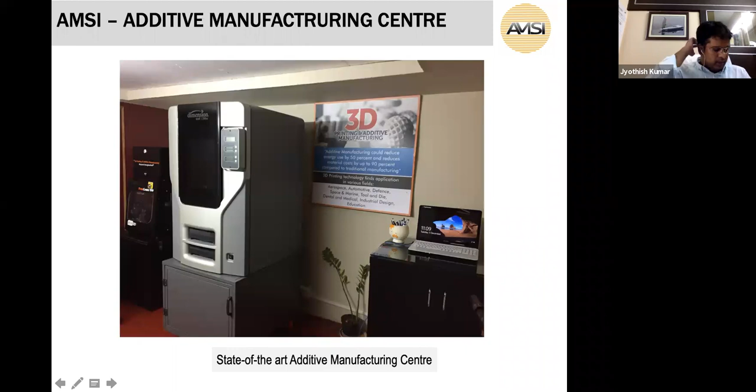We also have an MOU with the International Additive Manufacturing and 3D Printing Associations. This is one of the latest ones we formed, signing an MOU with the Asian 3D Printing Union in Korea, where we organize an annual event. I represent the Additive Manufacturing Society of India and the whole 3D printing community sectors from India.

Some of the other MOUs signed were with the French Rapid Prototyping Association, CMRDI, the Central Metallurgical Research Development Institute in Egypt, and an MOU with the German Consulate in India, focusing on 3D printing and research activities especially for defense, aerospace, and academic R&D segments. We also have an MOU with the British Deputy High Commission in India, to focus on various research projects related to 3D printing.

This is a brief introduction about our association and organization. Now I'll touch upon the basic introduction of what is 3D printing and additive manufacturing before I get into the latest metal additive manufacturing and applications.

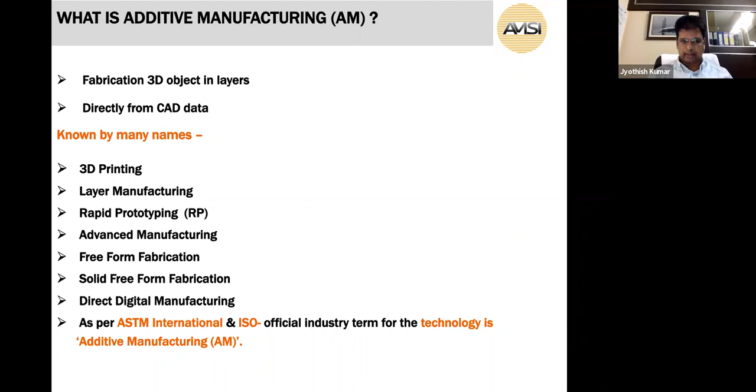There are three types of additive manufacturing processes: liquid based, solid based, and powder based. In liquid based, there are various technologies because the raw material is in liquid form, such as SLA stereolithography apparatus, then PolyJet printing, also called multi-jet printing, where the raw material is liquid and a laser cures it, converting it into a solid object. The solid based process is called FDM, fused deposition modeling, where the raw material is in solid form, that is in the form of a wire.

Then powder based, we have two types, one for plastic and one for metal. For powder based plastic additive manufacturing, it's SLS, selective laser sintering, where the raw material is duraform, a nylon powder. In case of metal, the process is called DMLS, direct metal laser sintering, and also LMD, laser metal deposition. These two processes use powder-based metal powder to fuse and form an object into a solid object by adding the metal powder layer by layer.

Another process is called EBAM, electron beam additive manufacturing, also called wire-fed metal additive manufacturing process, where metal powder is not used. Instead, the metal is fed as a wire into the machine, and a high powered electron beam melts the metal wire and forms the object layer by layer by adding material onto the object as per the CAD data.

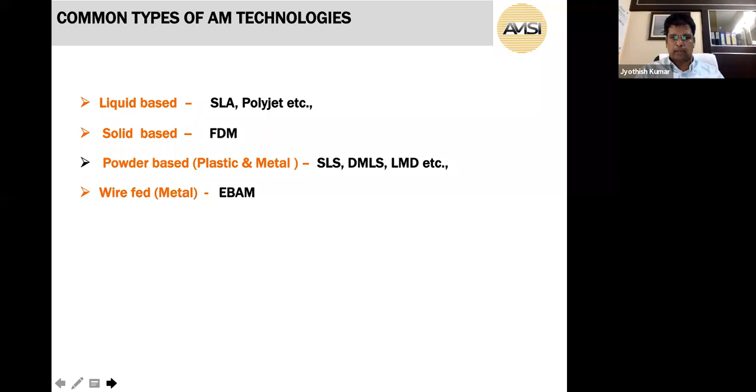I'm going to take one of the case studies where we have used a live case study for the HAL engine division. I got permission to share this PPT, and we have done fantastic research for Hindustan Aeronautics Limited.

The process we used here is laser metal deposition, which is a blown powder additive manufacturing process. The powder is blown into the platform, and the high power laser melts the powder and forms the object layer by layer based on the CAD data. The raw material is fed to the building chamber, and the laser melts, cures and solidifies, building the object layer by layer from bottom to top.

High powered 2 to 5 kilowatt fiber optic and CO2 lasers are used to melt the metal powder. There are various types of metal powders we can use: maraging steel, stainless steel, low carbon steel, then Inconel, with various types like Inconel 625, Inconel 718, and so on. There's also a latest material called MAR-M.

MAR-M is a lightweight material used for aerospace applications. Also cobalt, chrome, titanium are highly precious and important metal alloys for aerospace applications, along with tungsten carbides. Even copper can be used — the latest developments show copper powder can also be used to make components using this process.

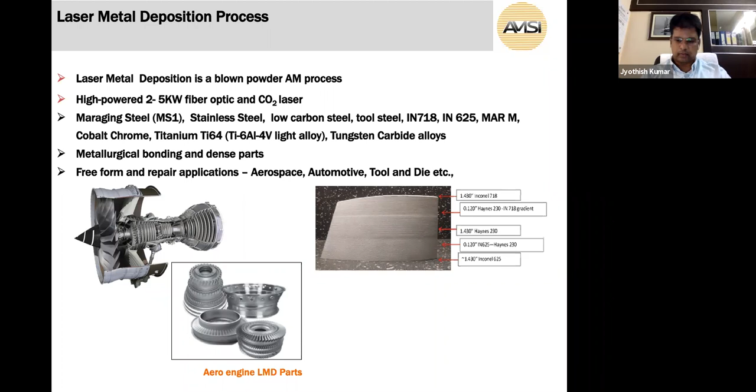I would like to show the video of LMD just for a better understanding of the process.

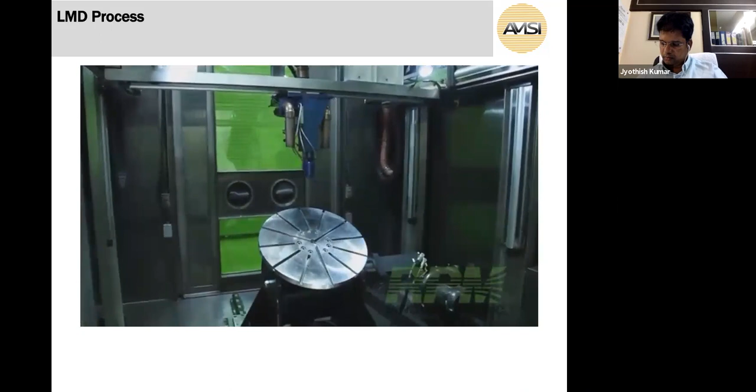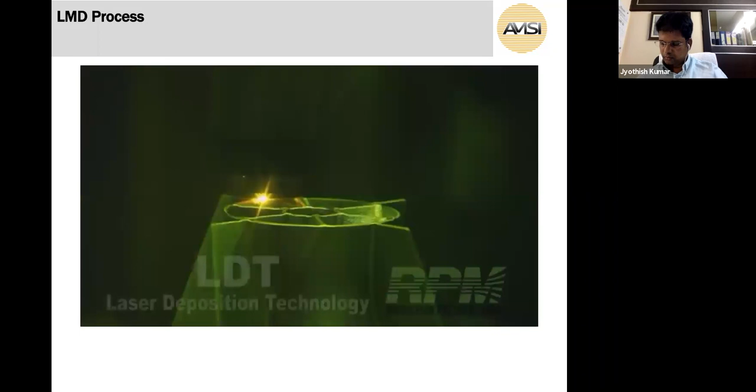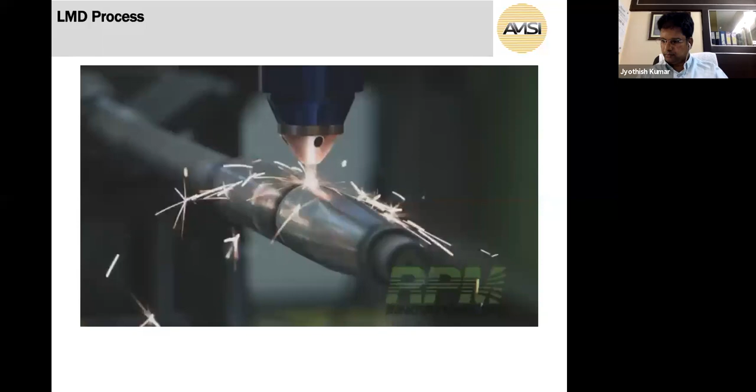LDT, which stands for Laser Deposition Technology, is an additive process used to build freeform fabrications. It repairs metal components typically considered non-repairable by conventional techniques, or strategically adds features to forgings or castings. All capabilities come directly from CAD data, and no hard tooling changes are required.

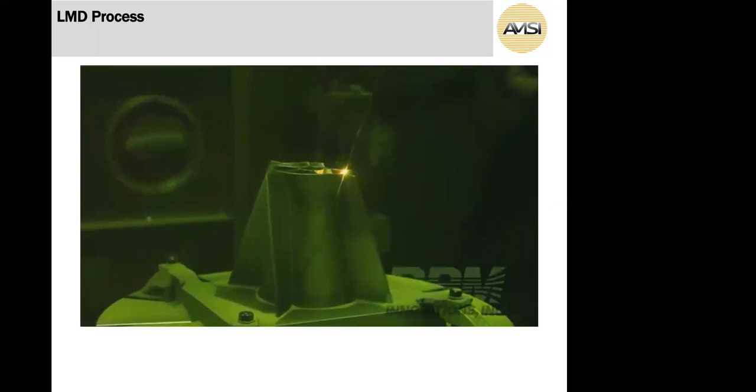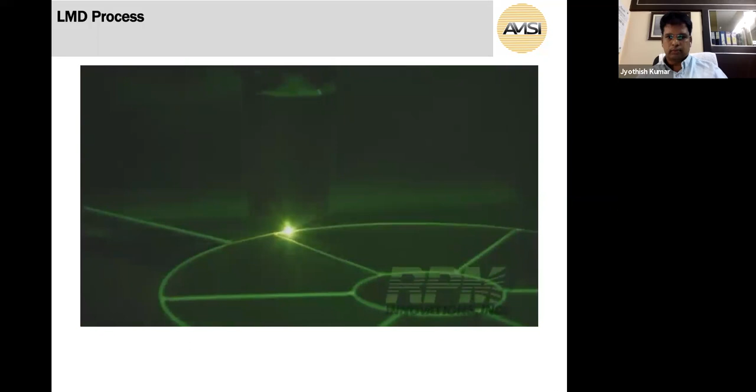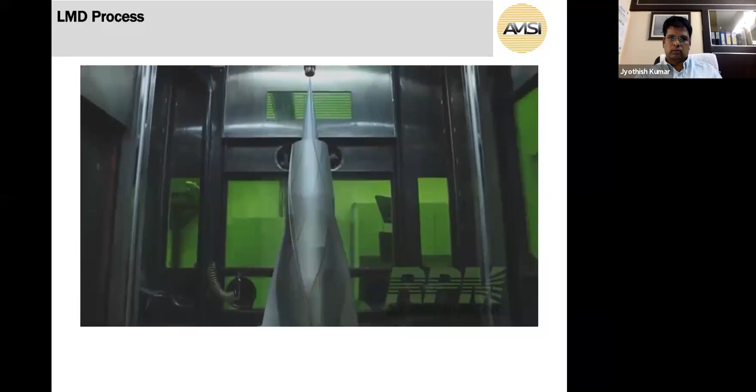LDT deposits exhibit excellent material properties. These properties, combined with the flexibility of the process, significantly lower overall production costs. When used for manufacturing and the production of prototypes, the LDT process greatly reduces product development time.

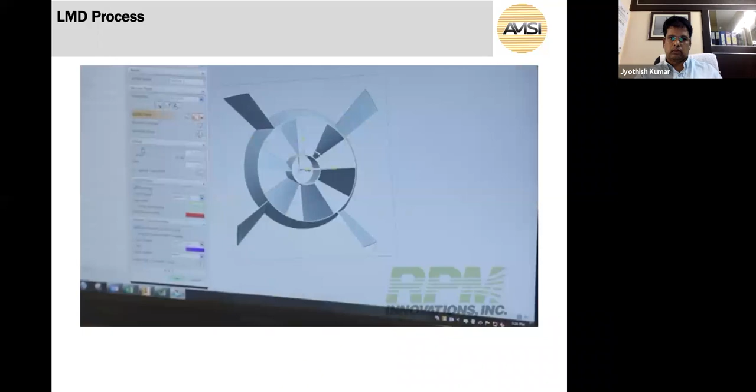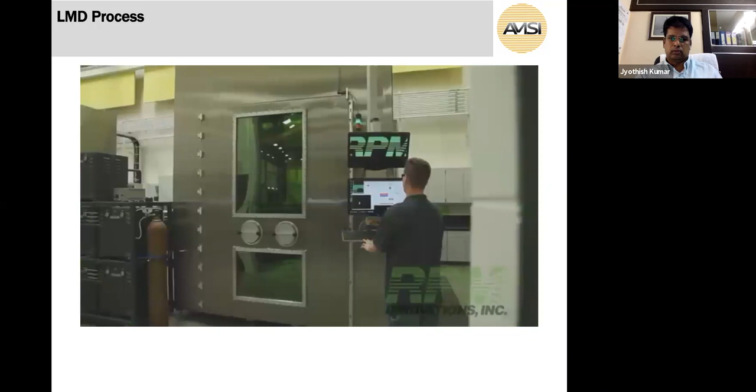First, a 3D CAD file is created that defines the component to be built. Next, the system software uses this file to slice the piece into numerous horizontal sections and then creates a toolpath for each layer. This toolpath is followed by the laser as the piece is created, layer by layer. The build takes place in a controlled environment chamber with less than 10 parts per million oxygen.

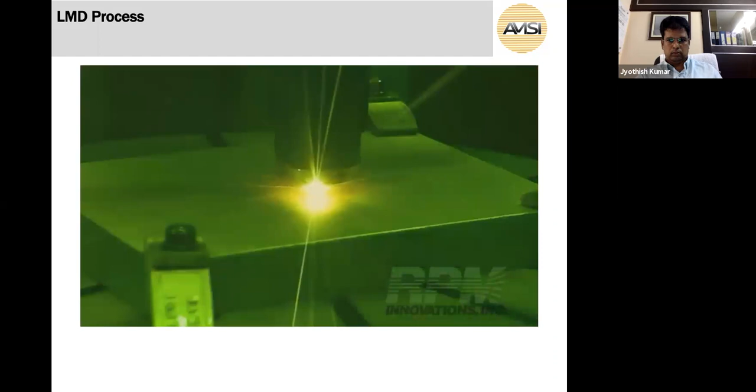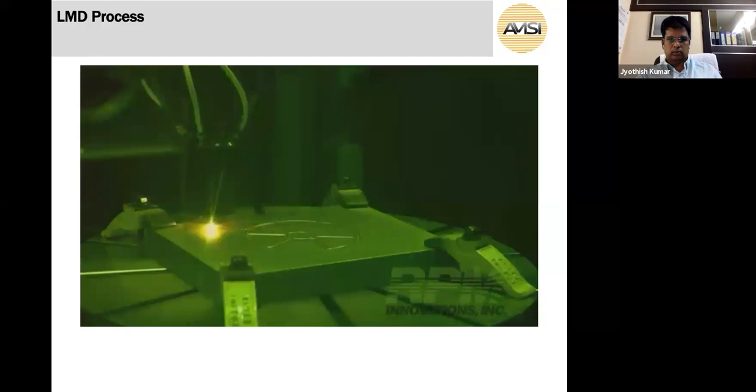Once the chamber is prepared, the build can begin. The laser fires and creates a melt pool on the surface of the target plate. A stream of powdered metal is delivered into the melt pool. When the powdered metal impacts the melt pool, it is absorbed and creates a weld bead. Fusing multiple layers together generates a 3D solid metallic build.

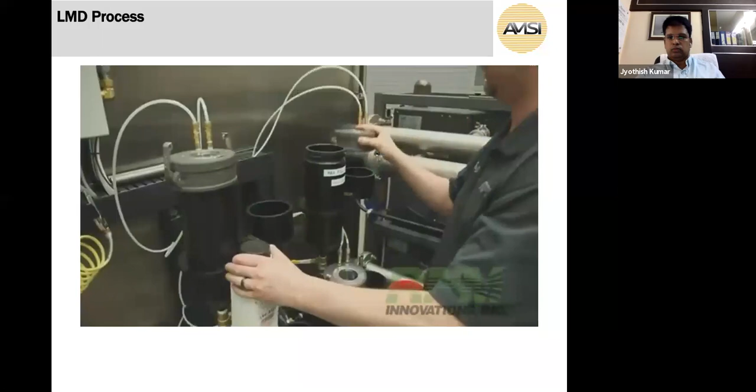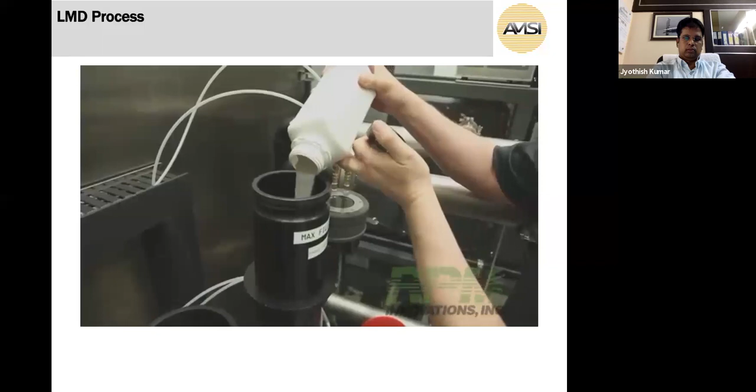A variety of alloys can be used in this process, including tool steels, stainless steels, nickel, cobalt, and titanium alloys. Deposit quality and consistency is of primary importance for all laser deposits.

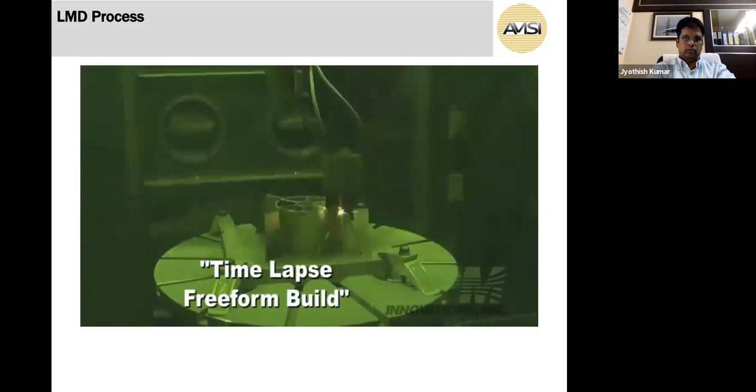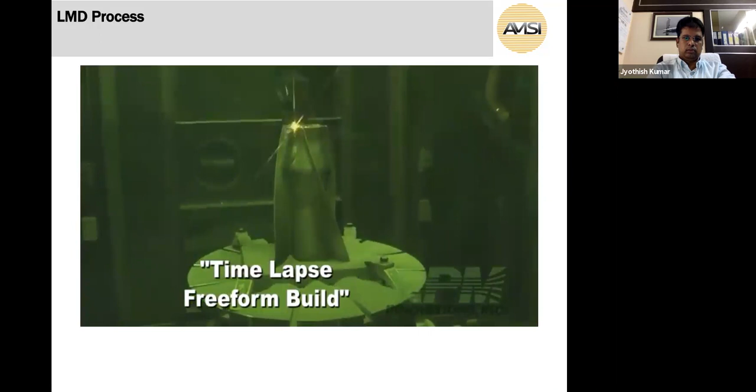Weld beads are produced in a very low oxygen environment with a very small laser spot size and relatively high travel speeds. The laser deposits have extremely high cooling rates. These cooling rates generate a very small localized heat affected zone, thus minimizing distortion. Also, the high cooling rates result in laser deposits that have very fine microstructure. Therefore, the deposits typically have similar mechanical and physical properties compared to wrought products.

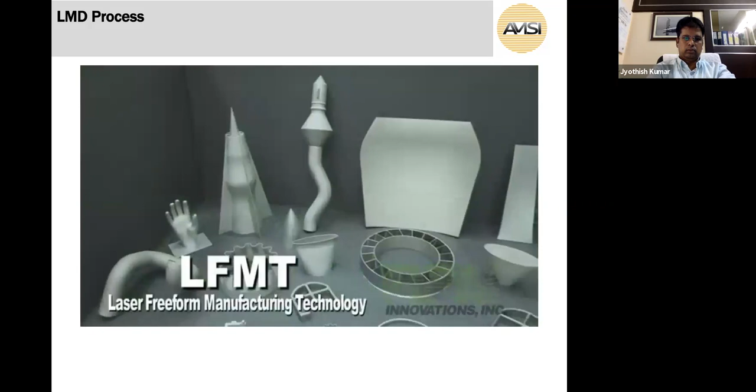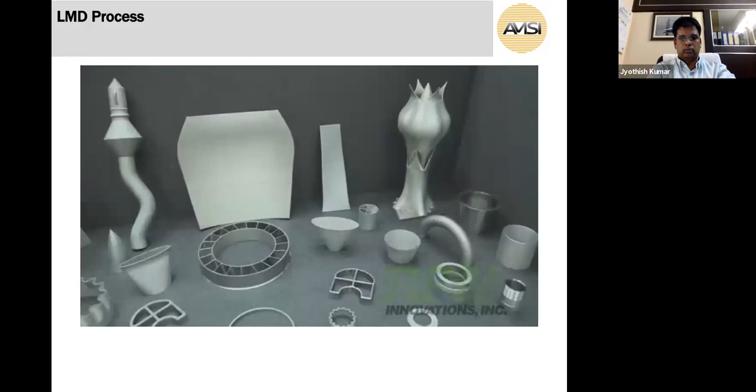LFMT, which stands for Laser Freeform Manufacturing Technology, possesses a unique ability to build parts with novel geometries from high-quality metal alloys and may transition to functionally gradient material compositions, opening the door for the production of breakthrough end products.

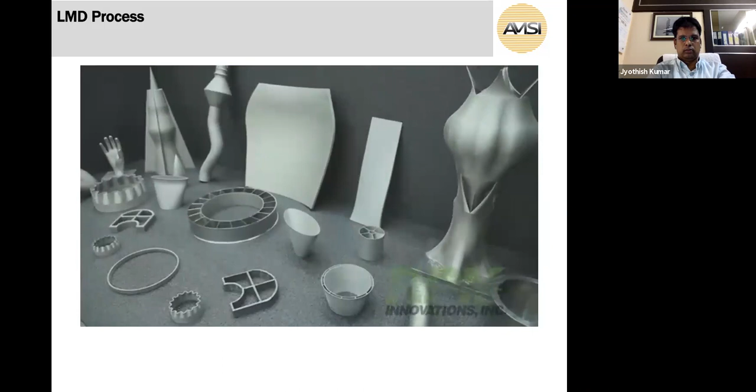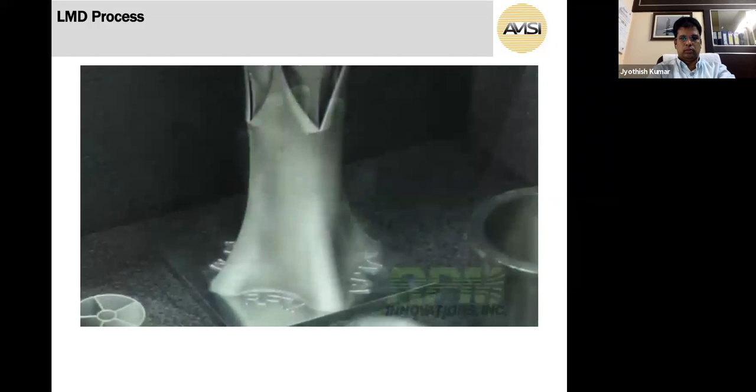Complex forgings and castings may be simplified and reduced in size, followed by the creative addition of specific features using the process. Substantial material and cost savings may be achieved using this novel combination of processes. Additional cost savings may be realized by the reduction of final machining time.

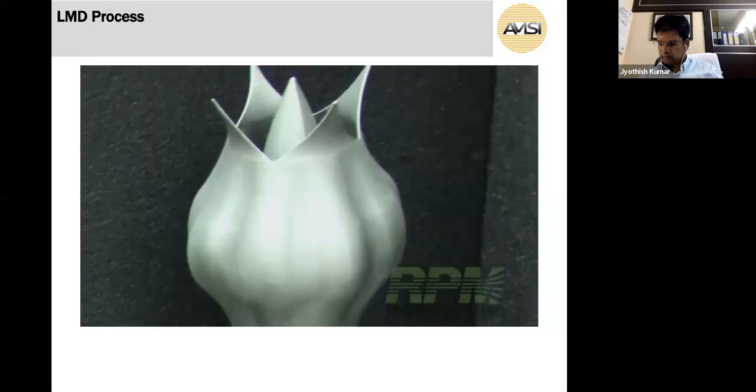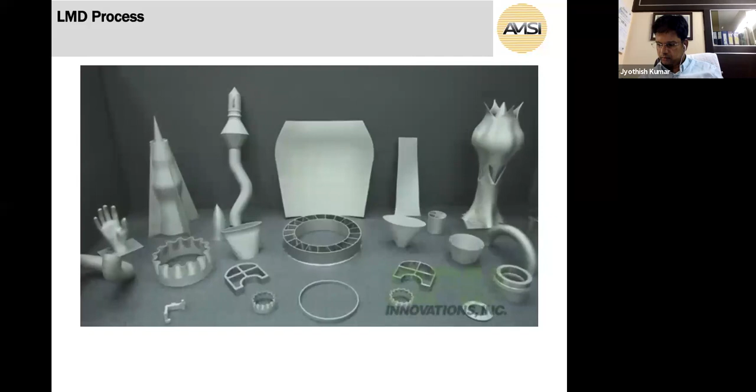Implementing design changes and new iterations for freeform builds is far simpler using this process than many traditional processes. Modifications are made in the CAD model, new toolpaths are generated, and a new version of the piece is deposited.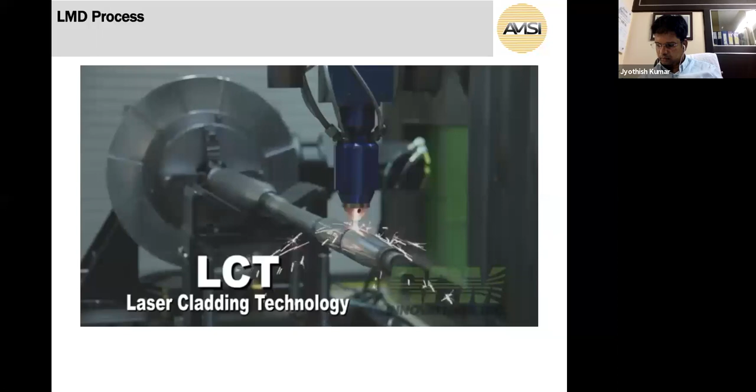LCT, which stands for Laser Cladding Technology, is also a very effective process for performing repairs on heat-sensitive materials, such as 4340 or PH-grade stainless steels.

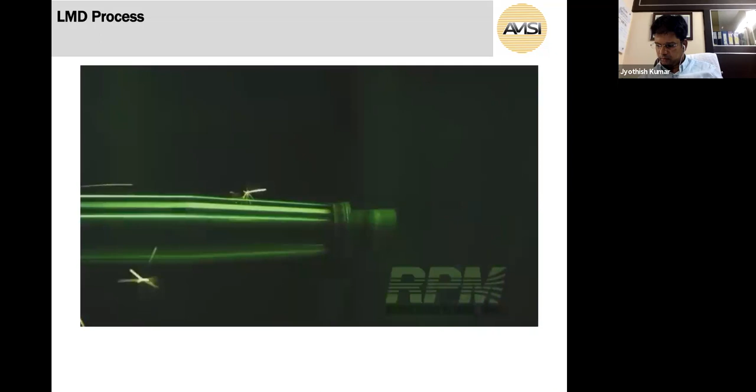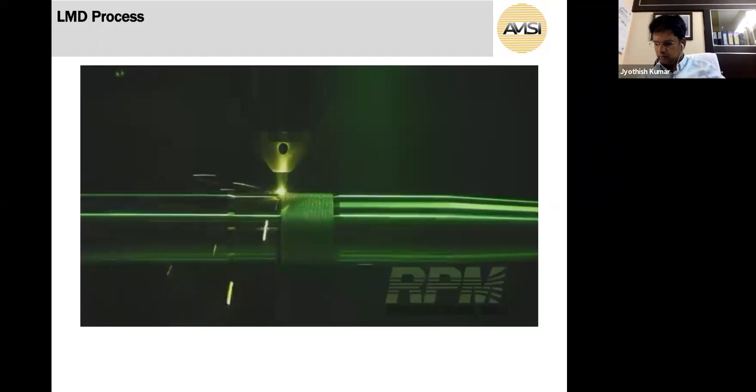After the wear area is identified and a tool path is generated, the repair is initiated. By carefully controlling laser power and travel speeds, the heat-affected and dilution zones are minimized. The result is a very low stress input into the part, which results in very low distortion.

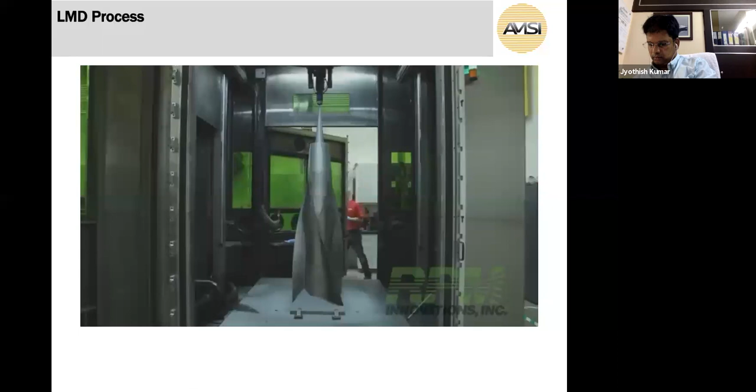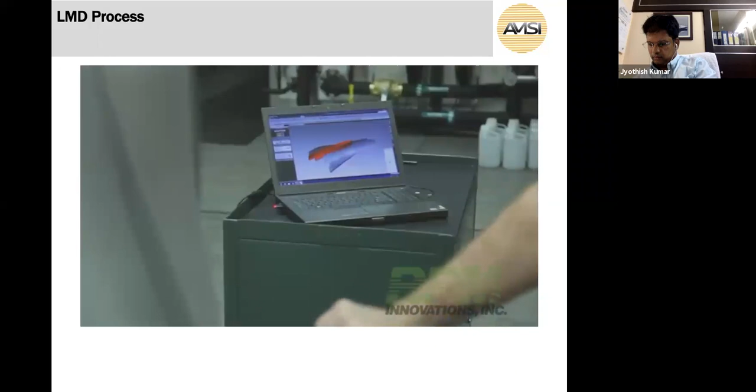After a build is completed, the component is scanned using a portable CMM and scanning laser. The scanned file is compared to the original file to be certain no significant distortions have occurred and that enough material has been deposited to ensure cleanup during final machining. Minor discrepancies are carefully noted so that future potential distortions can be compensated for and therefore avoided.

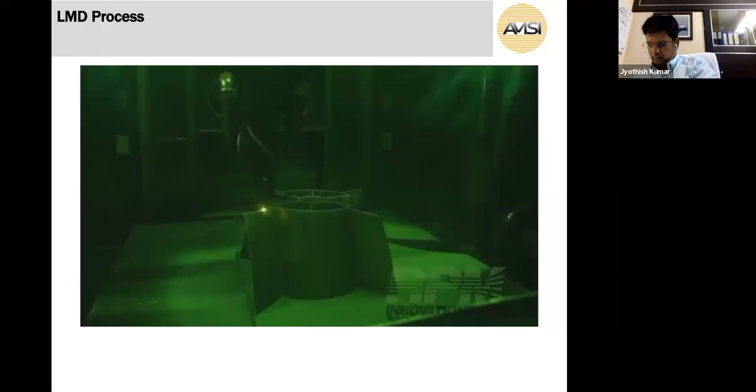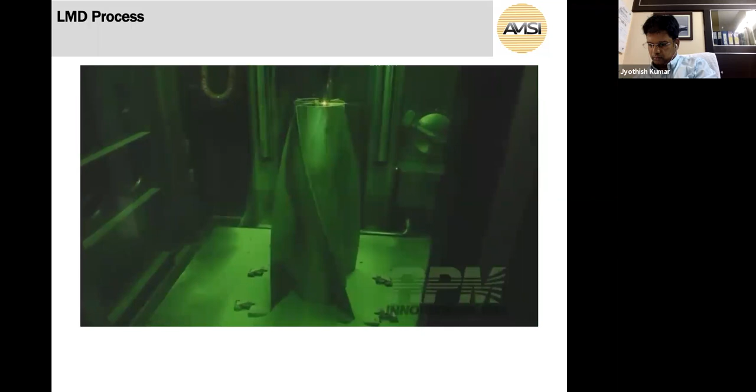With laser deposition technology, potential applications are endless, and the advantages over traditional methods of creating small runs, prototypes, and performing repairs are substantial. Lower per-piece production costs, lower upfront tooling costs, and greatly decreased development time represent significant savings in time and money. Enhanced design flexibility leads to better products.

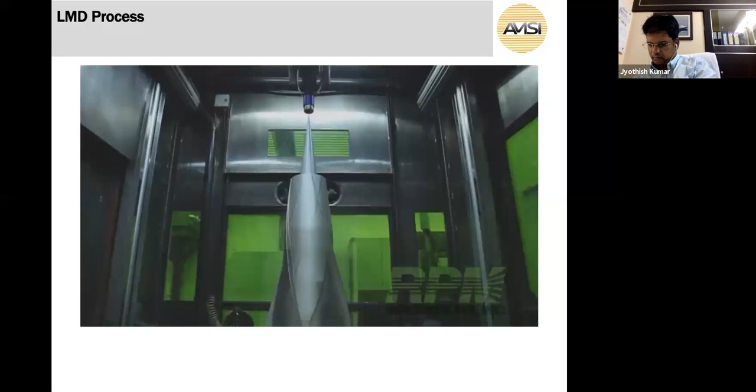Superior material properties provide longer product life, and the process can create products and repairs that are impossible using current traditional methods. For answers to your questions about specific applications, contact RPM Innovations Incorporated.

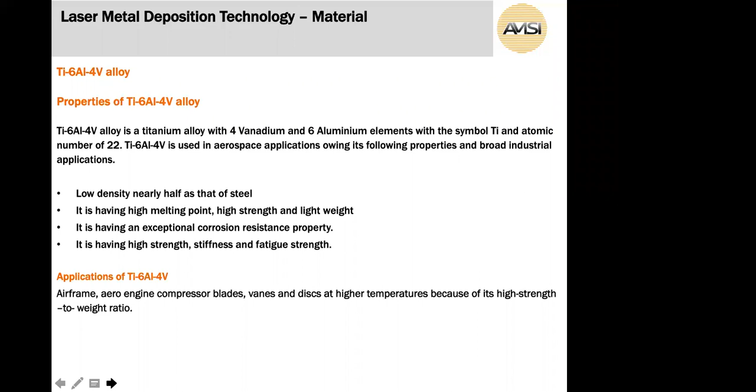So these are very critical, important aspects for aerospace applications, whereas the aero structure or the aero engine part has to take care of the load at higher speed, and also at the same time it should not contribute a higher ratio weightage to the structure or the part, because thereby it reduces the fuel consumption of the aero engine.

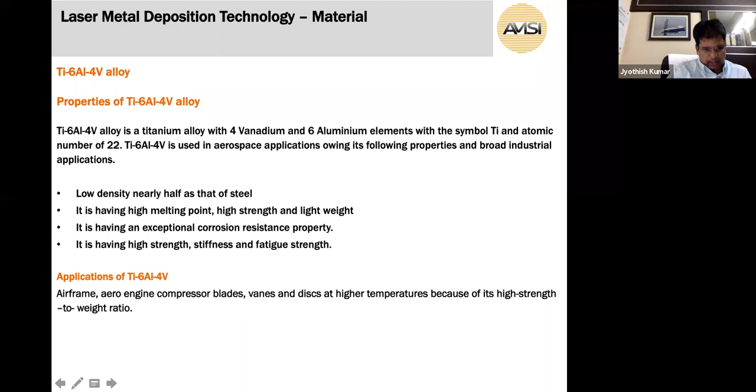The case study we have done is for HAL engine division, on repairing an axial compressor blade. This is an actual case study we have taken. This is the blade, an axial compressor blade from this helicopter engine. This engine is called the Artouste 3B engine. There are various types of engines in defense, and this is the one we selected for study. In this complete engine, we selected the axial compressor blade, which is a very critical component.

Initially, these components, after a certain lifetime, used to be thrown away because various factors contribute to failure, such as high temperature since the engine runs at high temperature, and external bodies like dust hitting the engine, contributing to damage. Even if just the edge is damaged, they would throw out the component and replace it, bringing down the engine to make a new component, which used to take more time and was very expensive.

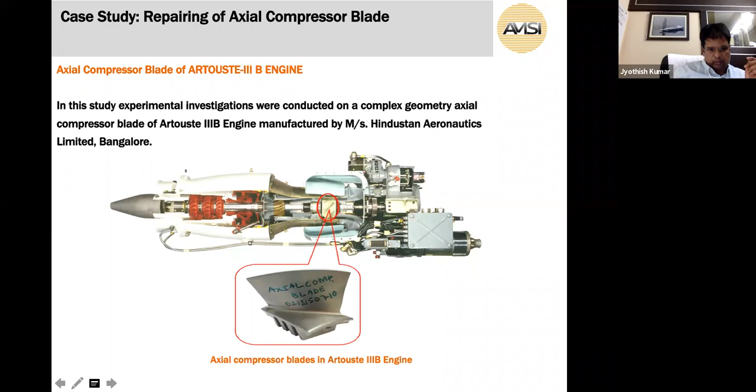Repairing of axial compressor blades: there are various types of failure occurrences on axial compressor blades. When we say axial compressor blade failure, the blades face various types of load, such as impact dents, high-cycle fatigue failures, wear and cracks at the leading edge. There are two ends in any axial compressor blade; one is the leading edge. The leading edge faces the most failure occurrences due to wear and tear and cracks at higher speed.

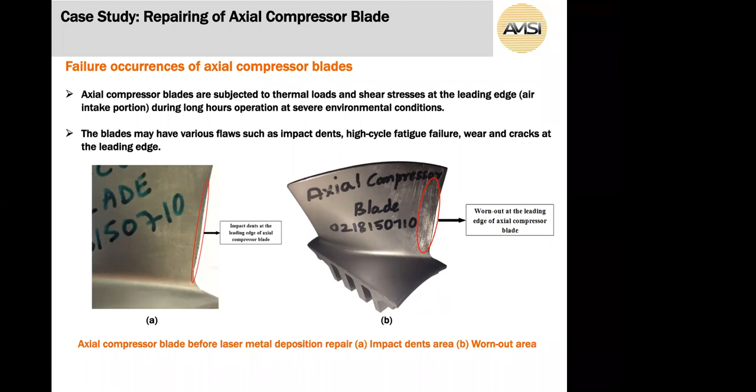As you can see in this image, the worn out portion shows that the axial compressor blade is not ready for further use, meaning we have to replace it. If we continue to use it, it will cause catastrophic failure of the entire aircraft. So once we see these worn out parts or dents on the leading edges, we have to replace the engine component.

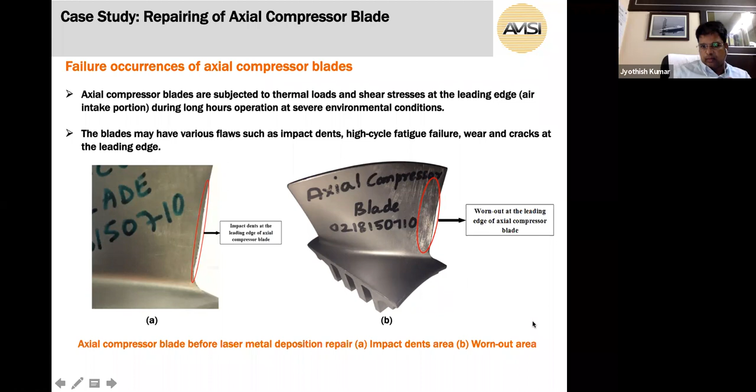Initially we did failure investigations to determine the mode of failure, whether it was only at the leading edge or also inside the axial compressor blade. We did NDT using ultrasonic flaw detector, liquid penetration test, and eddy current examination to detect surface flaws. But the investigations revealed there were no surface irregularities. However, visual inspection revealed some dents at the leading edge where air enters the engine, and some worn out portions.

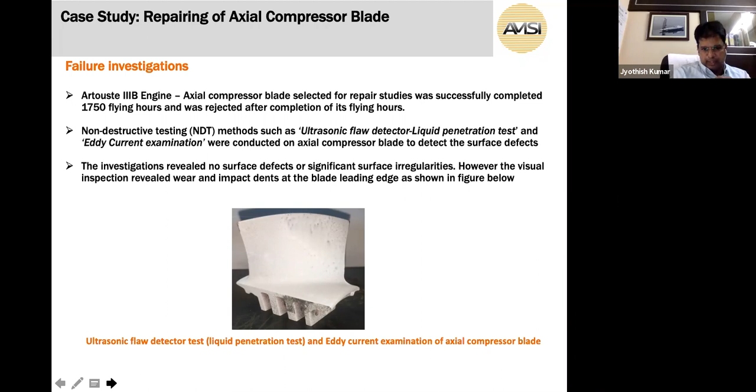So we found two locations at the leading edge. Another one is just opposite to the leading edge.

Initially we did a lot of preparations before depositing. Any blade or part going for repair using laser metal deposition, a metal additive process, has to be cleaned with different types of solutions. We used NovaClean 909 and acetone to remove foreign objects such as oil, dirt, and dust deposited on the surface before deposition. After cleaning, we placed it into a controlled argon chamber, because it's very important to have a controlled argon chamber in the LMD process, to avoid oxidation.

Some of the technical information: we used 5 grams per minute feed rate. Before this, we did a lot of characterization studies and process optimization of the LMD process to finally deposit the material on the worn out portion. These are some of the parameters: around 2650 watts of power, 5 grams per minute feed rate, 700 mm per minute scan speed of the laser on top of the depositing layer, with a thickness of 0.6 mm and 3 mm beam diameter.

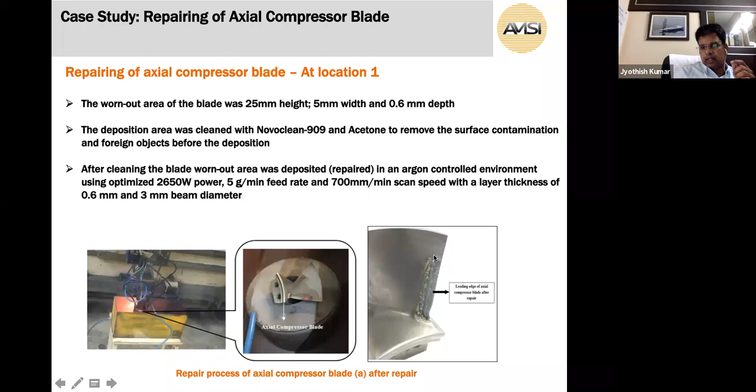As you can see, this axial compressor blade has been deposited. This shows the process being deposited, and this area shows the deposited portion. The highlighted area clearly shows that the blade's worn out portion has been successfully deposited.

After deposition, we did a lot of studies, such as microstructure studies. We did the cross section of the blade and studied various types of properties, including microstructure. Before microstructure studies, we had to do a lot of preparation, such as cleaning the surface to get good visibility of the microstructure in the inner portion of the deposition. Then we used an optical microscope to study the metallurgical bonding between the layers after deposition with the base material. This image shows the axial compressor blade being sectioned after deposition.

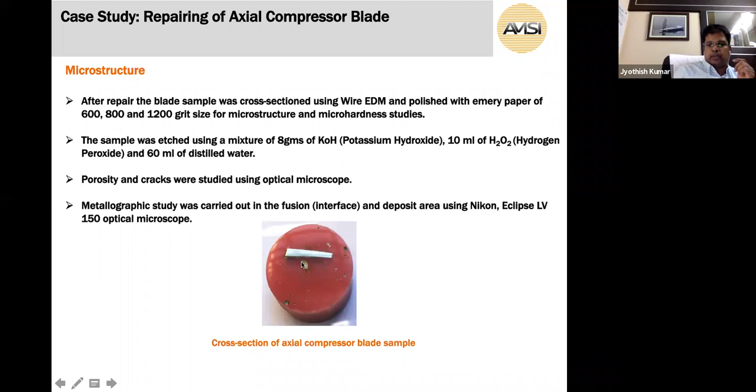The microstructure results: the Ti-6Al-4V alloy represents a fine Widmanstätten structure with an acicular alpha phase in the interface zone. When I say interface zone, that is the zone where the deposited material is bonding properly with the base material. If we observe the Widmanstätten structure, that shows the bonding with the base material is very good, and also reveals that the metallurgical bonding with the substrate material is very good, with less heat affected zone.

As you can see, this is a dense deposit area without surface cracks, completely dense without cracks or pores. This is the substrate portion — substrate being the base material, that is the blade, where we deposited the same material. This image clearly shows the Widmanstätten structure across the deposit, the interface, and the substrate. It completely looks like a single material with a clear Widmanstätten structure, where the deposited material is completely bonded with the base material. This is the interface where you cannot differentiate the line between the deposited material and the base material, which we call the substrate.

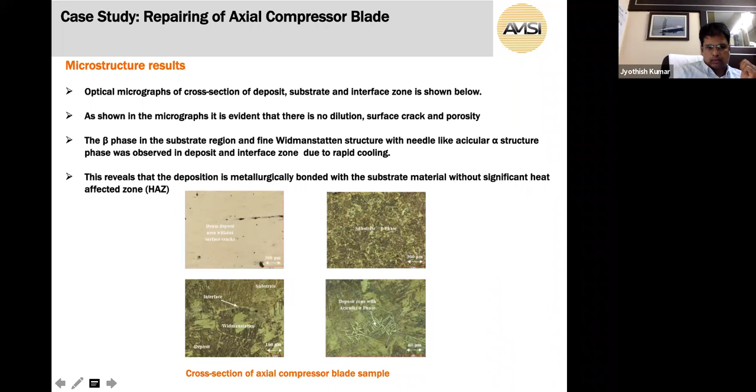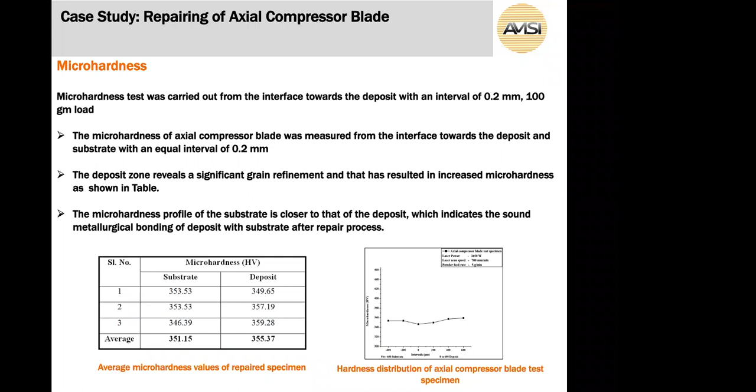We also studied the micro hardness. Micro hardness is a very important factor — once we deposit any material onto the base material, we have to test it. As you can see in this table, the deposited material and the substrate show almost the same values in terms of micro hardness distribution, which shows that the deposited material has bonded completely with the base material.

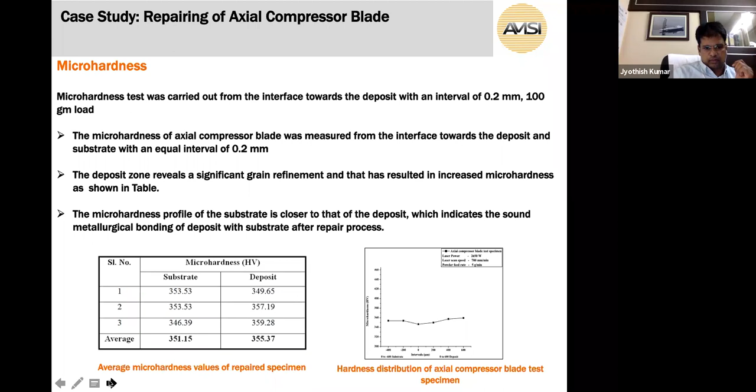Again, we studied the microstructure of the bonding material at two locations. The first was location 1; we again sectioned the deposited material with the base material of the axial compressor blade and studied the microstructure at location 2, which shows complete bonding between the layers. Again we did all the cleaning processes for microstructure analysis, with initial preparations made as per ASTM standards. Then we studied the cross section of the compressor blade, showing clear bonding between the base material and the deposition.

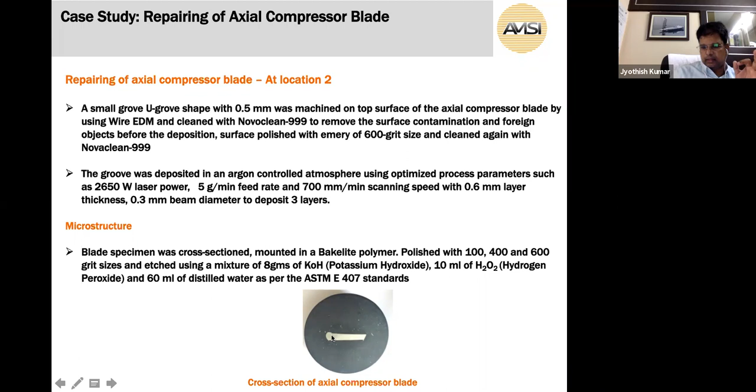Yeah, this is the structure. This is the cross section view of the blade, and this is the microstructure result. This microstructure result reveals again the fine Widmanstätten structure, which is a very important phenomenon of any Ti6Al4V alloy. As you can see, this is the fine deposited area with the base material, and this is the interface line.

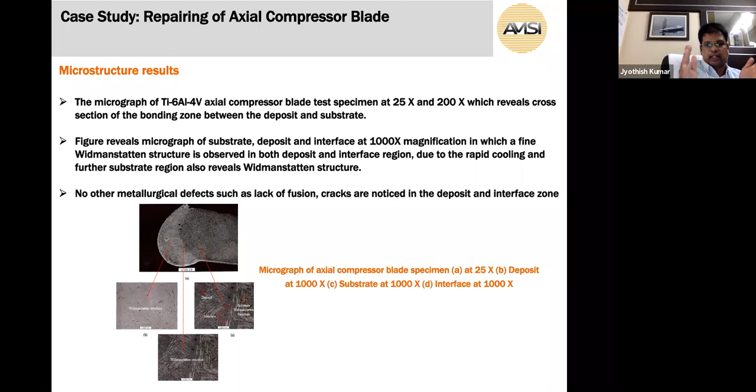So the bonding between the base material and the deposition is completely dense and clear. There are no pores and no cracks, which clearly shows that the deposition is successful for repair applications.

Later on, we also studied the porosity. Porosity is a very critical factor of any engine components when we deposit using any additive manufacturing process, such as blown powder or powder bed fusion. The porosity contributes a lot in terms of controlling the strength of the component, and we should have minimum porosity to have a better structure, better bonding, and better strength of the component.

And as you can see this, obviously there is no porosity, and it shows the clear bonding between the layers, and the deposition is dense and completely solid.

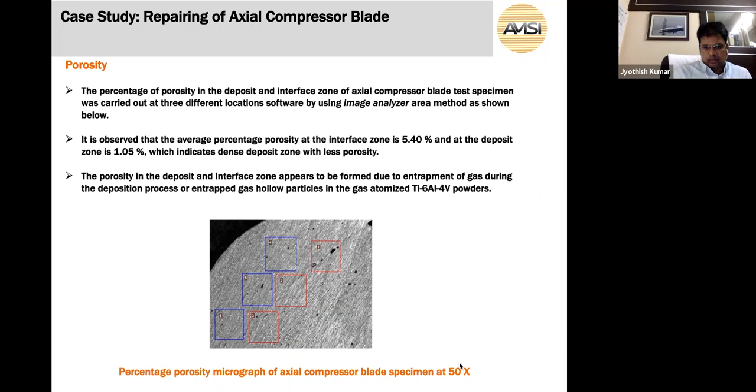Some of the data have been plotted, and it shows that the bonding is very good. The interface shows a very good result of porosity and hardness, which is almost closer to the bonding between the base material and the deposition. That is evident that the deposited material is completely melted with the base material, showing very good strength of the repaired blade.

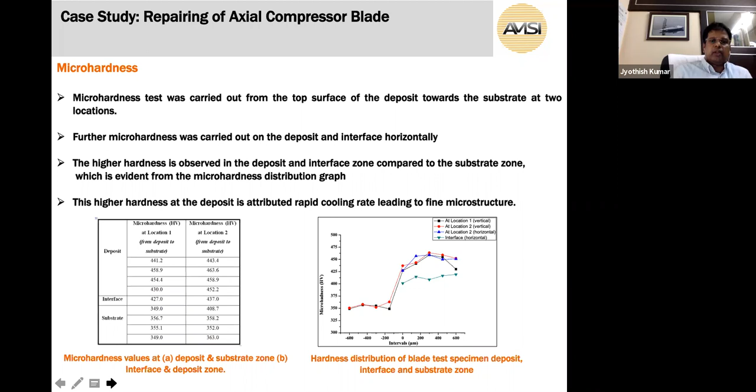So the conclusion part of the axial compressor blade repair: what we observed says that the repaired Ti6Al4V axial compressor blade revealed a fine Widmanstätten structure, which is on par with the literature search as well as the base metal structure of the Ti6Al4V alloy.

It also showed sound deposition with good interfacial bonding between the deposit and the substrate without lack of fusion or cracks. That is a very important factor, because I also showed in my previous microstructure that the bonding between the material and the deposition was very good, without pores, cracks, or anything else, and it was completely dense deposition.

And the porosity level in the deposit was also very low in both the deposit and the interface zone, within the acceptable limit. There are certain limits of porosity you can accept, up to 1 or 2 percent porosity that you can accept. So the deposition process was done within the acceptable limit, and the porosity level was very, very low for different applications.

And finally, the result shows that laser metal deposition is a potential process to repair critical high value aero engine components with reduced cost and time. When I say high value aero engine components, titanium alloys are very precious, and we cannot waste even a gram of material.